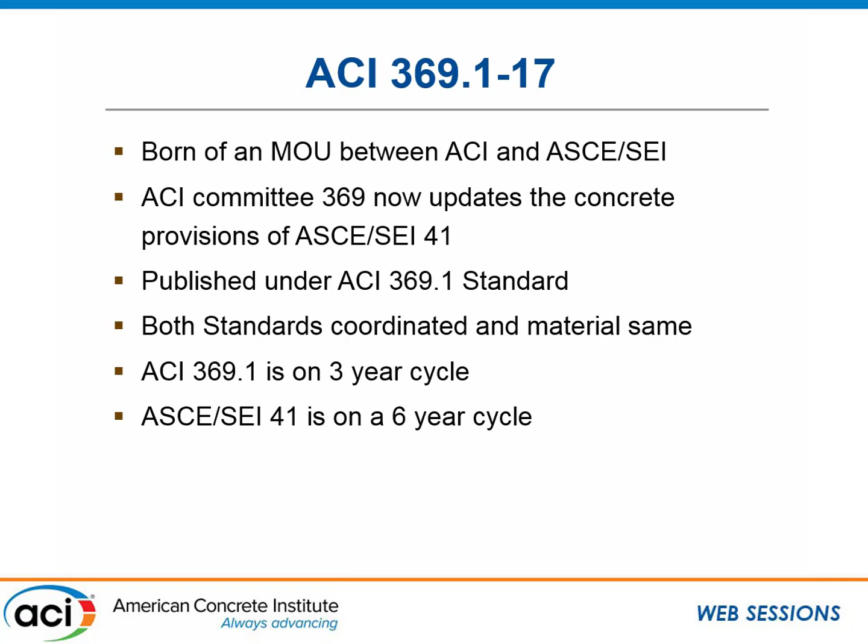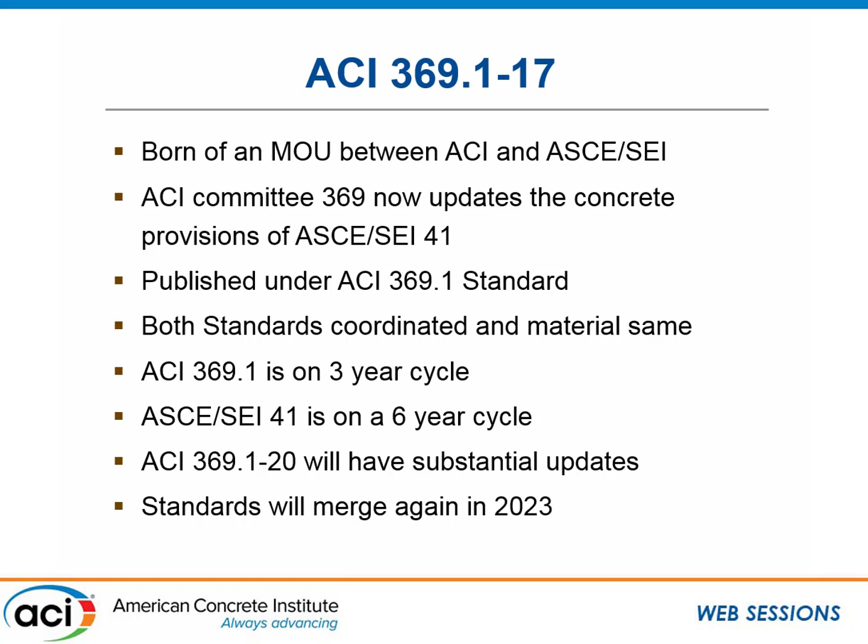And what we're going to talk to you about is what are the big changes you can expect for the 2020 code cycle. So what have we been up to and what we're doing there. Our standards will merge again in 2023. So in 2020, the ACI 369 standard will be substantially different from ASCE 41, and in 2023, all these changes and any additional changes we make will get into the 2023 version. And this is what our standard looks like, and there's also a metric version.

So the committee itself, we've expanded. We have the one main committee and 5 subcommittees. The main committee has 23 voting members and is balanced according to ACI rules, as well as consulting members and associate members. We have the general provisions subcommittee, the frames subcommittee, the walls subcommittee, diaphragms and foundations, and retrofit.

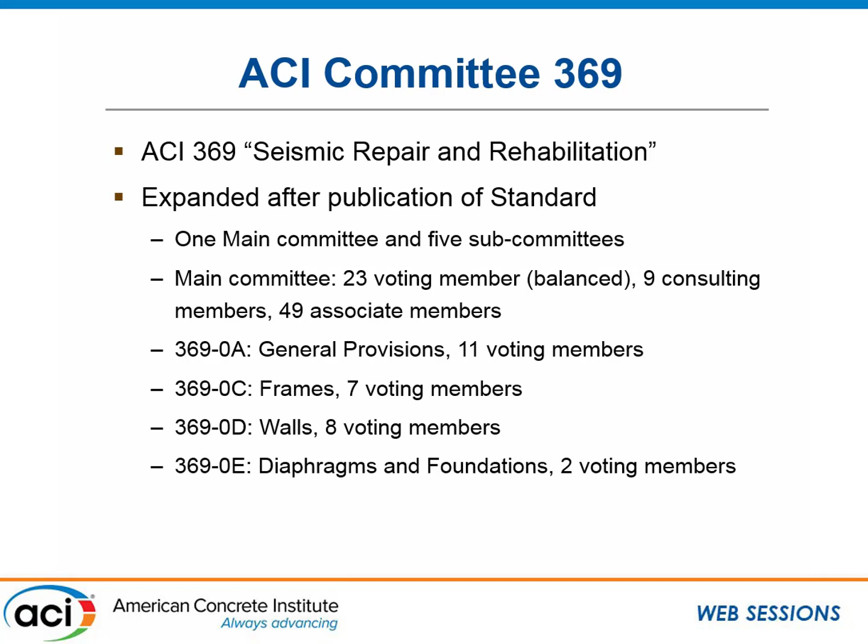I want to talk a little bit about a project that FEMA is supporting, through ATC. It's a very big project. FEMA is providing funding to make really big changes to 41 and 369. These are the things that committee members cannot do on their own; these are very big efforts. We met earlier this year, a steering committee, and we decided on the high priority topics that FEMA will be funding.

These are listed here: linear procedures, nonlinear procedures, Tier 1 and Tier 2 procedures. What matters to ACI 369 directly is the concrete structural wall provisions. There are also some URM masonry provisions being changed and foundation modeling provisions also. There are big changes coming this way. In the linear procedures, we are looking at them from the ground up, seeing how well they do and really updating them.

Nonlinear procedures, Adolfo set up this one really well with his presentation. There is serious talk about, for collapse prevention, removing all member level checks and going to more global level checks, trying to account for the fact that the failure of one member does not necessarily mean the failure of the building. And for that, there's also increasing member criticality in the deformation-controlled function. So there's a lot of things here, but we're going to focus on the concrete part of things.

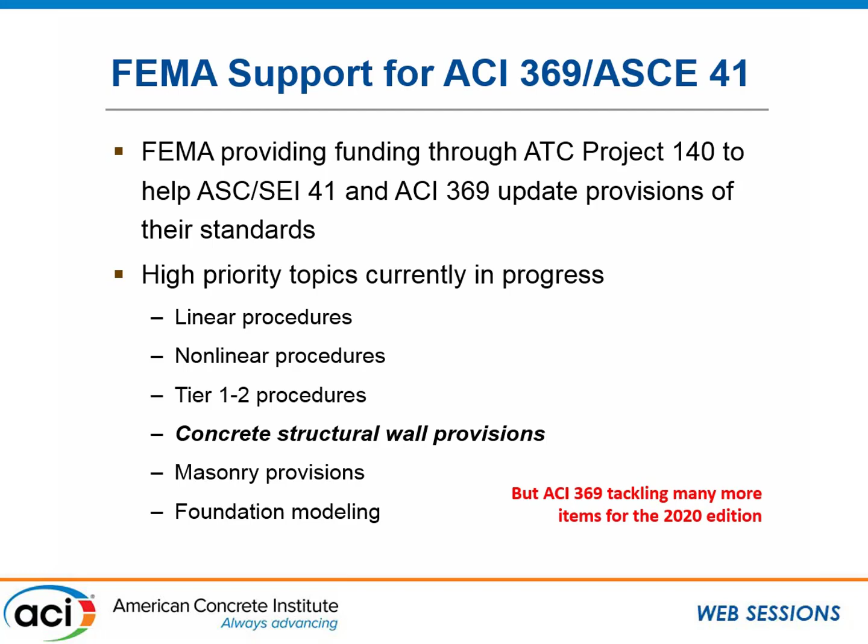And ACI 369, just to mention, so this is the project, the structural walls are being worked on within that project, but we're tackling a lot more things in 369, and that's what we're going to present today. With that, I'll open up to Insung Kim, who is the chair of the General Provisions Subcommittee.

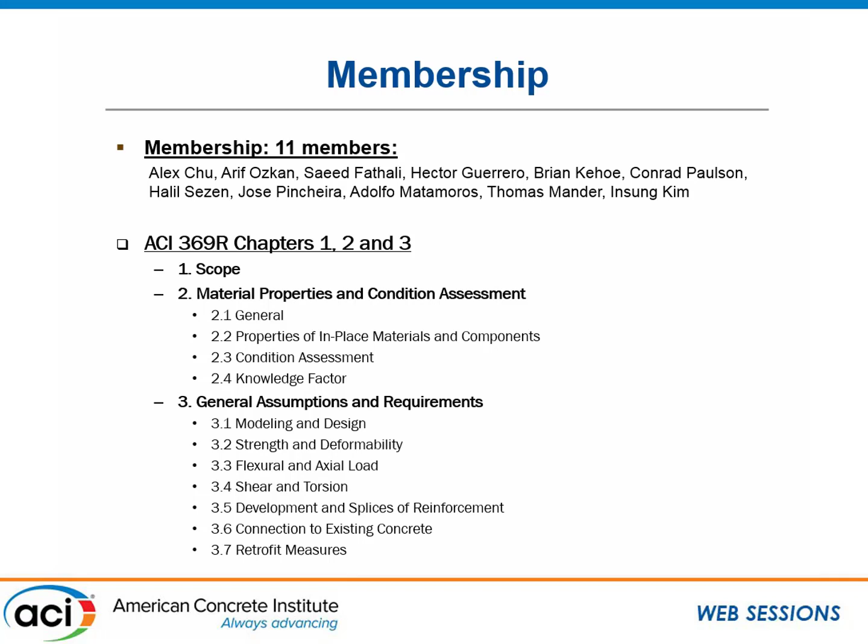Okay, so as Washim mentioned, we have 11 members. We mainly take care of the 3 chapters, chapter 1 to 3. Chapter 2 is about the material properties and condition assessment. And then chapter 3 is more like the general calculation or general estimation of strength and deformability and so on. So we are dealing with not member specific, but more like general ideas applied to all other chapters.

Currently, we have 5 or 6 main tasks. First one is anchor testing and strength provision. So basically, the idea is when we have existing anchors in the existing structure, when we evaluate this existing anchor capacity, how are we going to do it? How many samples we need to take, what kind of test method we need to use, and where we need to test. That kind of thing is being developed now. It is led by Brian Kehoe in our membership.

And the other thing is about material strength. When we do nonlinear analysis and even linear analysis, ASCE 41 has 2 actions. One is force-controlled action and the other is deformation-controlled action. For deformation-controlled action, we use expected strength, and in the ASCE 41 definition, that's the mean of the strength from the test. And then we have lower bound strength for force-controlled actions, which typically corresponds to nominal strength.

So Adolfo is leading this effort on how we're going to set up this lower bound and expected strength more adequately. I have another slide for that. And then also effective stiffness. When you do either linear or nonlinear analysis, you need effective stiffness of members, and ASCE 41 has a table, and our standard 369.1 has a table, Table 5, showing the reduced effective stiffness from the gross stiffness. We will try to update those values.

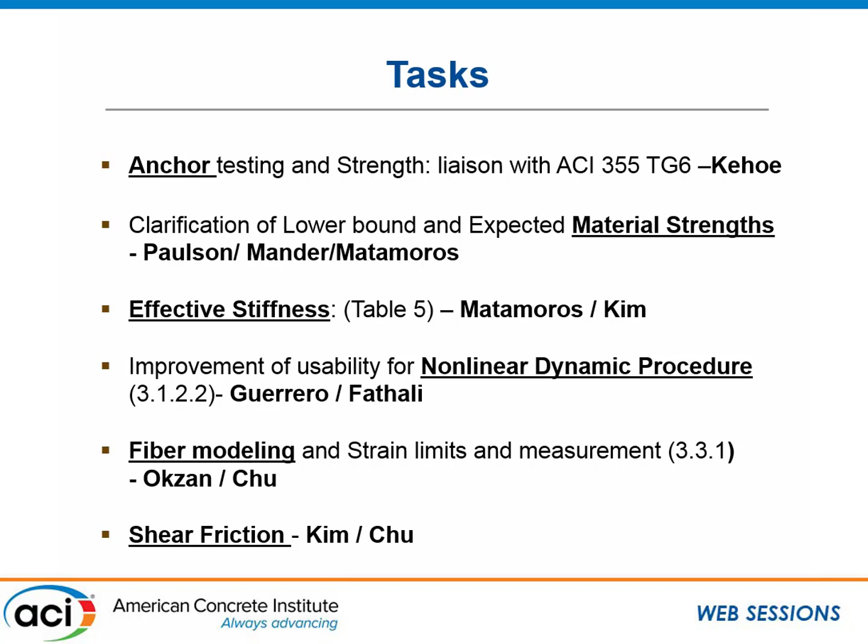So one of the things we are working on, which Adolfo is leading, is lower bound and expected strength. Right now, for example, for steel reinforcement, we have just one factor, 1.25, which converts nominal or lower bound strength to expected strength. And now we are thinking about what that number actually needs to be. That 1.25 includes the actual overstrength of yield when you test it, and also includes some of the strain hardening effect.

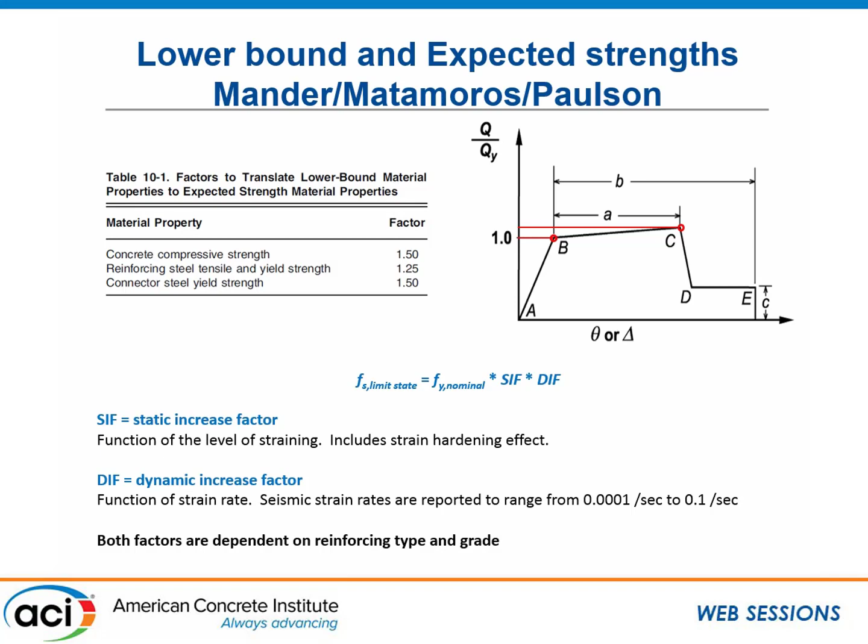And then we try to separate that and put it as two separate factors, one for the actual overstrength and the other for strain hardening. And we are also considering implementing a dynamic increase factor, which considers the strain rate effect. So that's a SIF for the overstrength of yield and strain hardening, and then DIF for the dynamic strain rate effect.

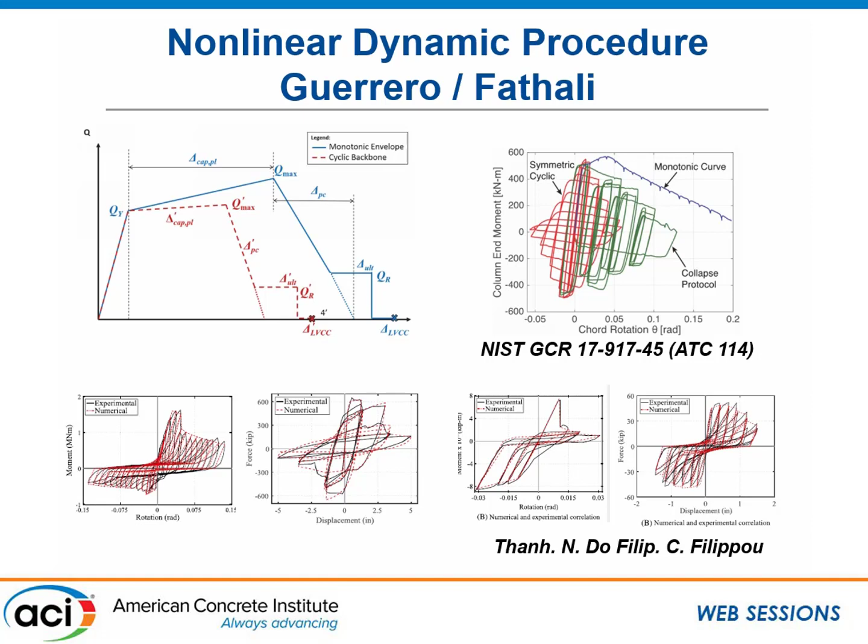And also we are trying to improve the nonlinear dynamic procedure using the recent studies from ATC 114 and other projects. So basically, we try to provide more guidelines on how, when people do nonlinear response history analysis, to model the hysteresis, based on our knowledge from the test data and these kinds of projects. So that's pretty much what I have.

Orders from the boss to do it quickly, so we'll go as fast as we can.

The purview of 369 Sub C is the chapter on moment resisting frames, so that would be section 4 in the document. And as I was mentioning, the concern is we've made a lot of changes to the column provisions. We want to update all the other elements to make sure that we're being consistent throughout. We understand the different levels of safety that should be had when we're judging acceptance criteria, but in the modeling we should try to be agnostic.

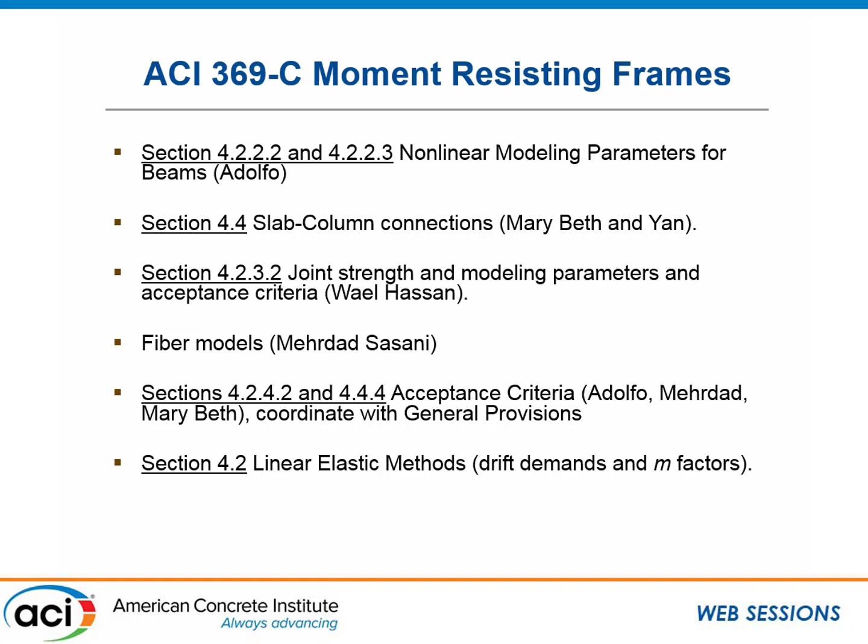We should try to represent each member in what it does. And so we're going to be working on beams, slab column connections, and joints. For example, for beams, we're looking at updating modeling parameters and eventually acceptance criteria. In the case of slab column connections, this is the work that is being done by Mary Beth Hueste from Texas A&M.

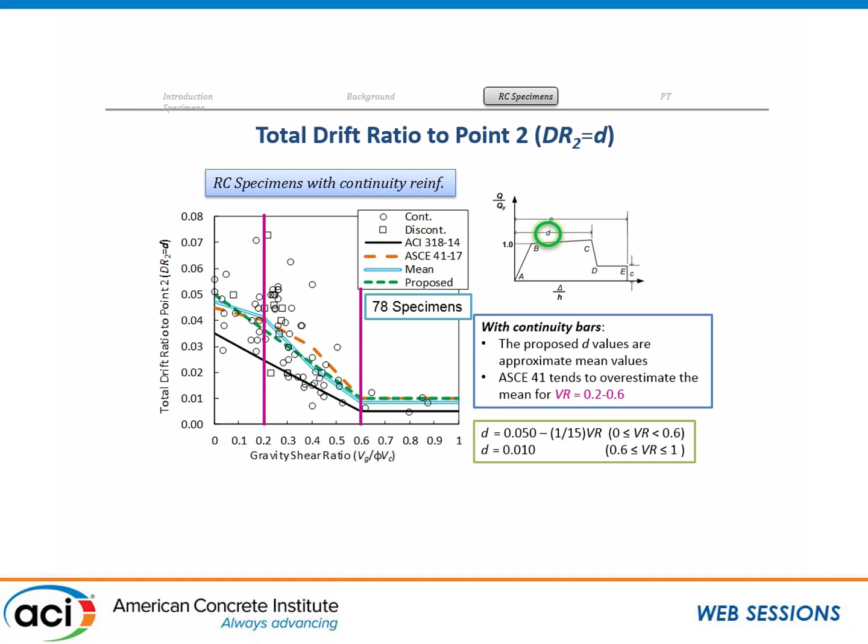You see here in her graph is total drift demand versus gravity shear ratio. This is very typical in the simulation and evaluation of these types of members. And what she's done is she's collected a database and is trying to provide, for example, the green line is what she's doing, the black line is what 318 does today. 318 for new design adopts a very conservative approach. For the purpose of modeling, we're looking more for a mean approach so that there's no bias between beams and columns.

In regards to joints, we're trying to take a close look at joint capacity equations. We think that those need some revamping. We're going to look at modeling parameters and acceptance criteria. And I think in Laura's presentation, there was a small thing that is extremely important, I think we need to provide better recommendation about what to do. There's that simple model that is in ASCE 41 now. The way that it is written in the provisions is only applicable to linear analysis. And so we think the code is silent on what to do with the joints in nonlinear analysis.

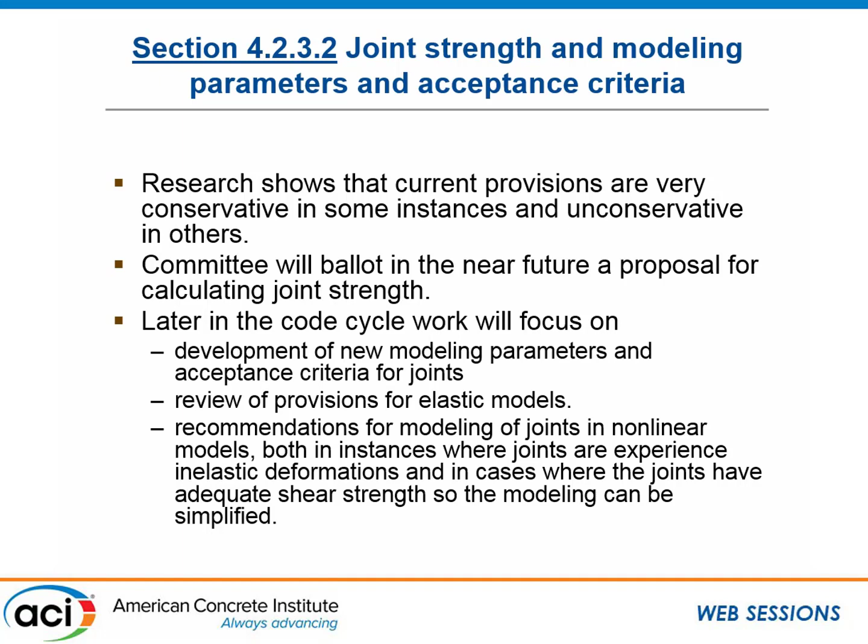And we're trying to listen to designers in the sense that in many instances the joints are not going to be the critical factor. So if we can look for simplified ways to model the joint when the joint nonlinearity is not critical in a nonlinear analysis, that makes the nonlinear analysis less painful. So we were trying to develop recommendations for that. And that's it for me.

I'll speak on behalf of Garrett Hagen. He was not able to come here. He's traveling overseas. He's the chair of the Wall Subcommittee. So we're going to give you a little bit of overview of what we're doing. A lot of this effort is handled by the ATC 140 project, but there's a lot of cross membership between the project team and the subcommittee. So we're going hand in hand in this project.

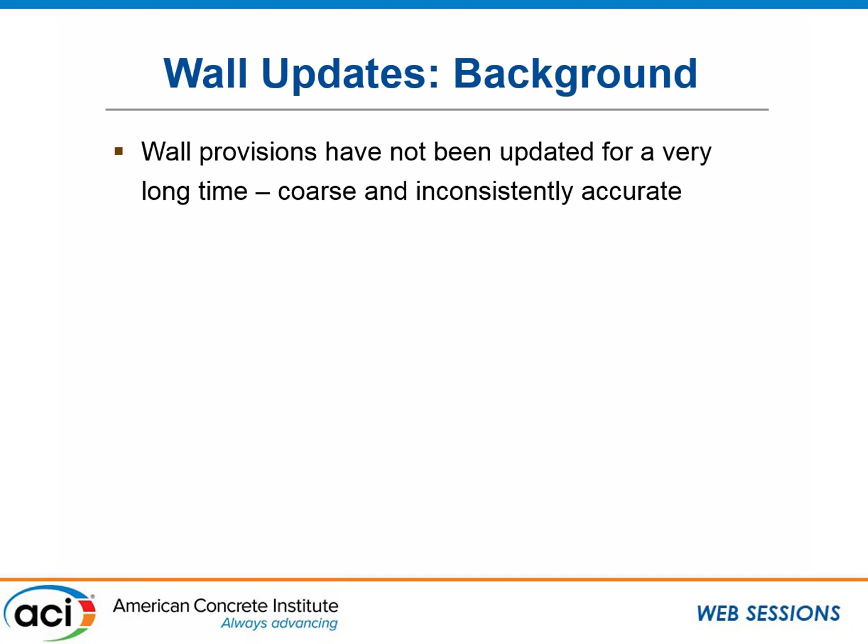So the working group is looking at really wholesale updating the wall modeling parameters and acceptance criteria, so big changes to be expected for the 2020 version. The wall provisions, we haven't updated them in a long time, specifically the flexural ones. We generally consider that they're quite conservative and they're inconsistent in conservatism and accuracy. These are his slides, I'm trying to do them justice.

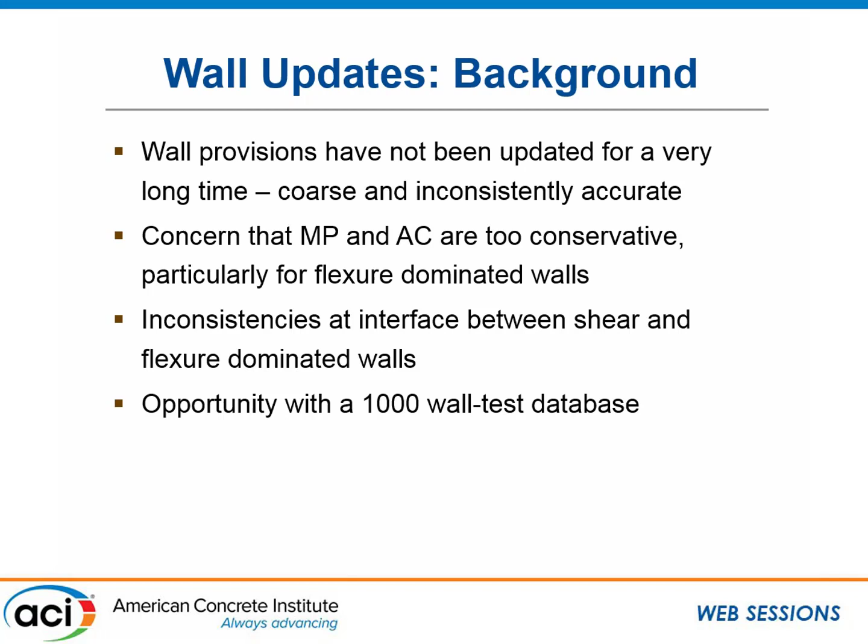So currently what we have is an opportunity. Professor John Wallace, who's also a member of the committee and of the task group, has populated a 1,000 or so wall test database with Saman, who's sitting here. He did all the hard work. And so we have an opportunity now to come in and really change the wall provisions. Also, things we're trying to address is limited modeling guidance. Most of the engineers use fiber sections for walls, whereas ASCE 41 or ACI 369 are written with only lumped plasticity. So how do you go from one to the other? How do you get to the right acceptance criteria with a fiber section model when it's given to you as a lumped plasticity thing?

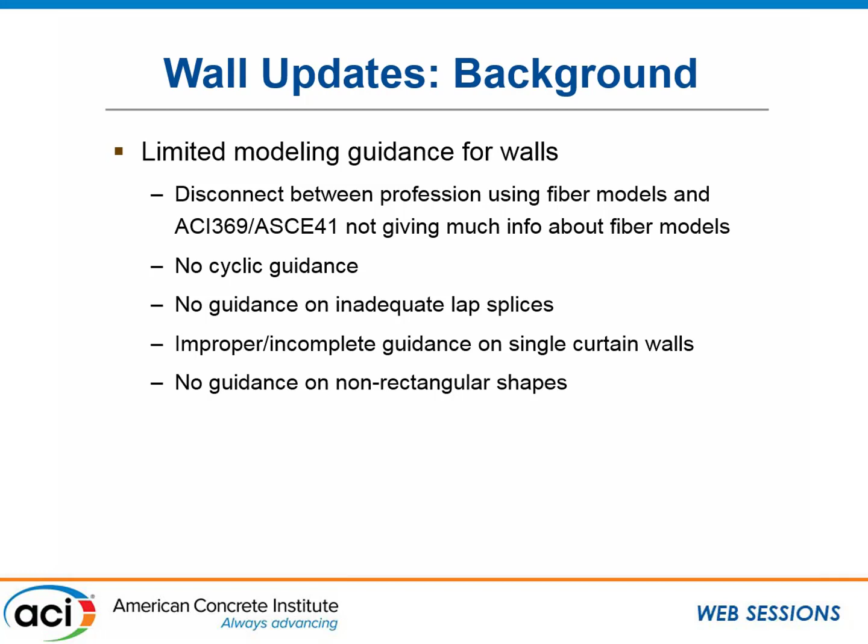There's also things that are missing. There's no cyclic guidance, which we will be tackling. There's inadequate lap splices. We only have the column provisions. We're trying to translate them to the wall provisions. There's also no real guidance for what do you do with a single curtain wall as opposed to a double curtain wall. Also, non-rectangular shapes are not really treated. In addition, looking at coupling beam issues, similarly, they have not been updated for a long time. There are some very conservative parameters in there. So also things like what is collapse for a coupling beam? Do we really need to worry about the coupling beam collapsing? Or is it just treated as a loss of lateral strength for the building? And also nothing much about diagonally reinforced coupling beams.

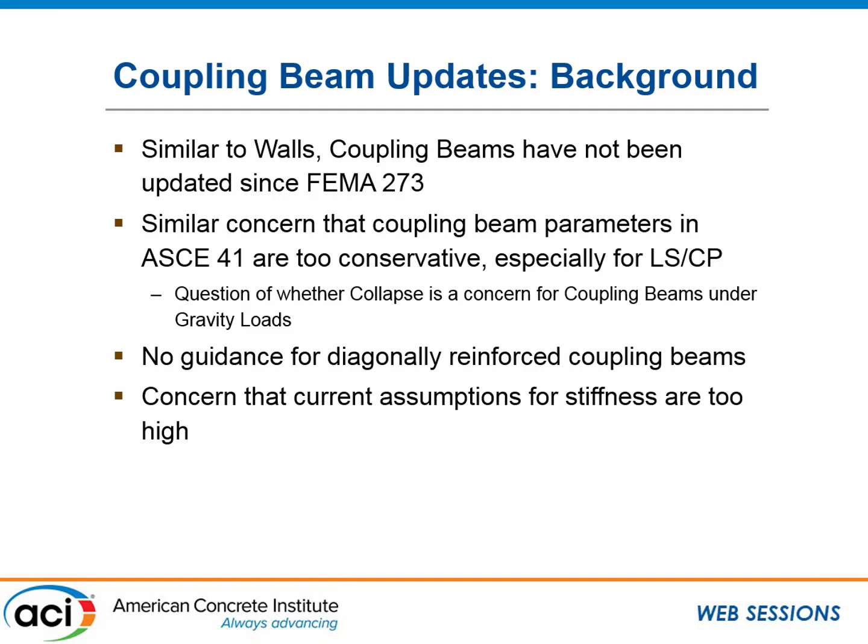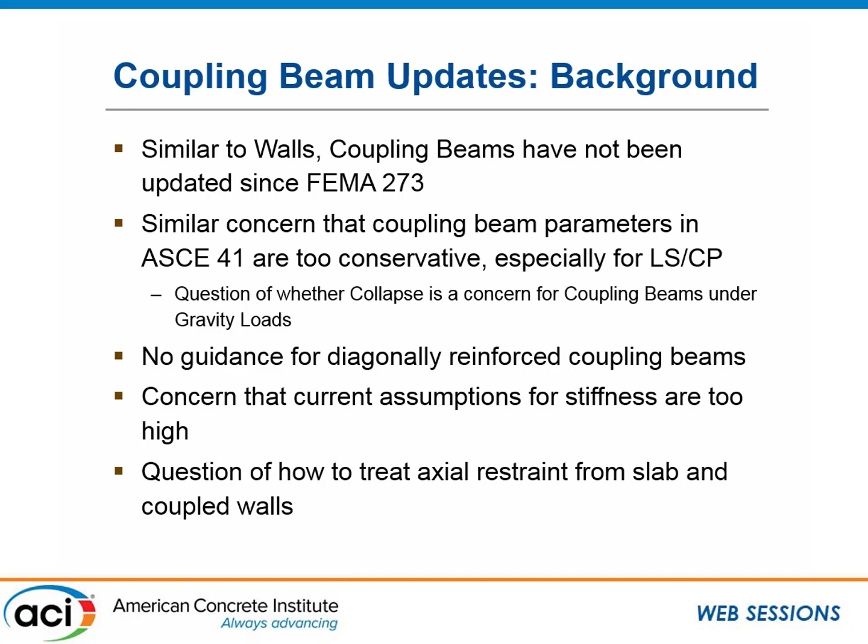We also have the stiffnesses being a little bit too high for our taste. Okay, one last thing. What to do with a slab? There's nothing about what is the performance of a coupling beam that is framing into a slab section. So the objectives, I kind of mentioned them as I was going through. We're going to revise the modeling parameters and acceptance criteria for the walls. We are going to give full modeling response guidance, including cyclic behavior. So this is going to be new in ASCE 41, ACI 369. This is the first member where we're going to put cyclic guidance in there.

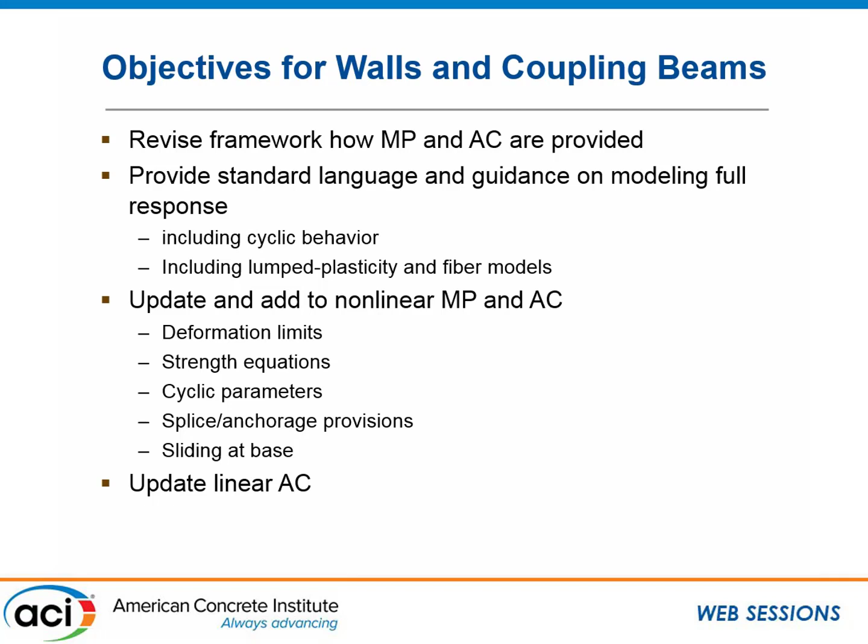And we're going to look at everything from deformation capabilities, strength equations, splice and anchorage, even sliding at the base of the wall. And finally, we will update the linear acceptance criteria. So a lot of changes. If you're not happy with the wall provisions, wait 2 years. In 2020, there is going to be a lot of changes there, including cyclic behavior.

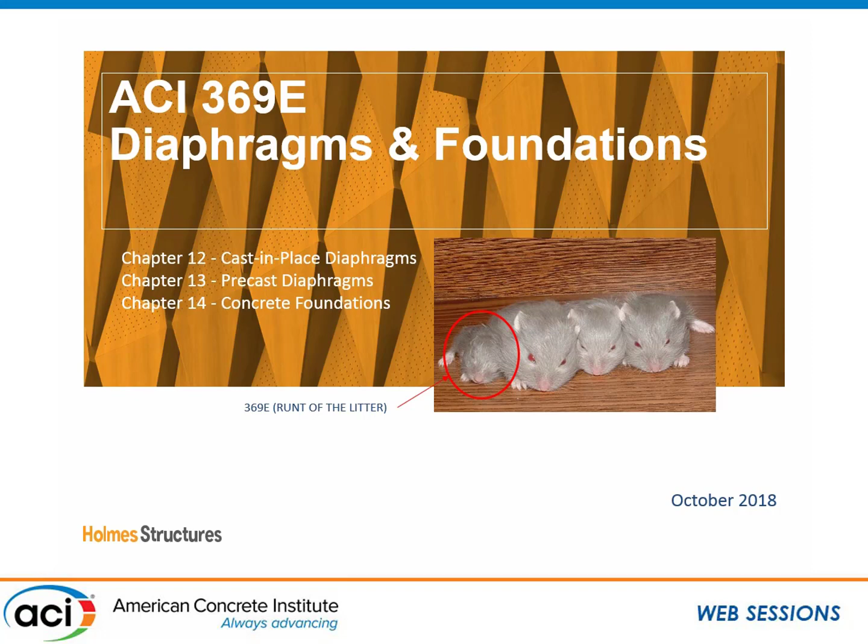So this is what we are calling the diaphragm and foundation committee. You might see that this committee has only 2 members, so we are still looking for people to join this committee. The problem is, I think there are not many people actually interested in this committee because we don't really know much about diaphragms and foundations. So currently,

ACI 369 and ASCE 41 have very conservative provisions for diaphragms and foundations, because we don't really know much about them. And sometimes we ignore them in our design, but they are very important load path components when we're dealing with lateral load. So basically, Arne is

working on identifying typical problems in diaphragms, such as the slab to wall interface, which is related to the 369A general committee shear friction issue, and then the precast concrete diaphragm problem with frame elongation. You might have seen Ken Elwood's presentation about the Statistics House building in New Zealand. When the earthquake happened, the beam elongated, and the hollow core panels became unseated and then collapsed. And then also ramps and stairs. He is tackling how to deal with ramps and stairs in the lateral system.

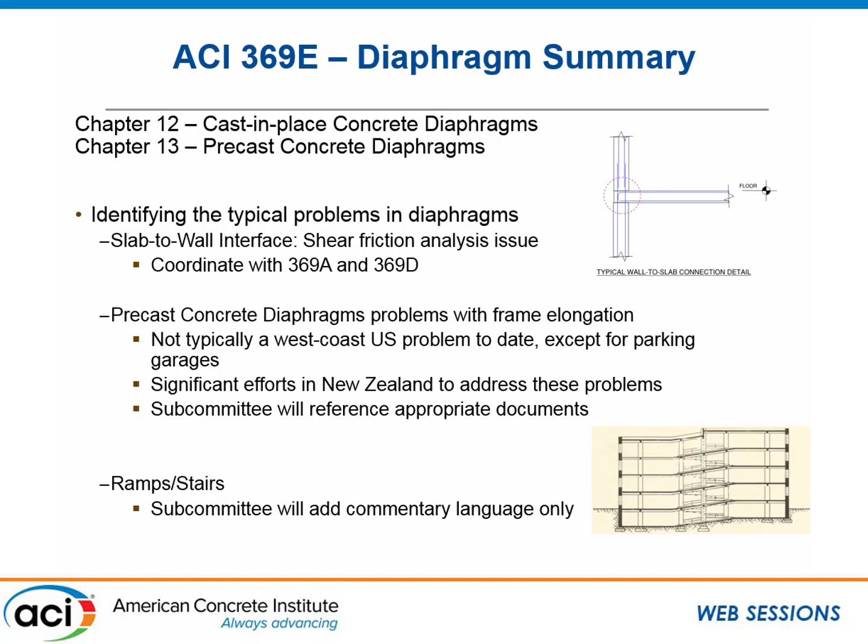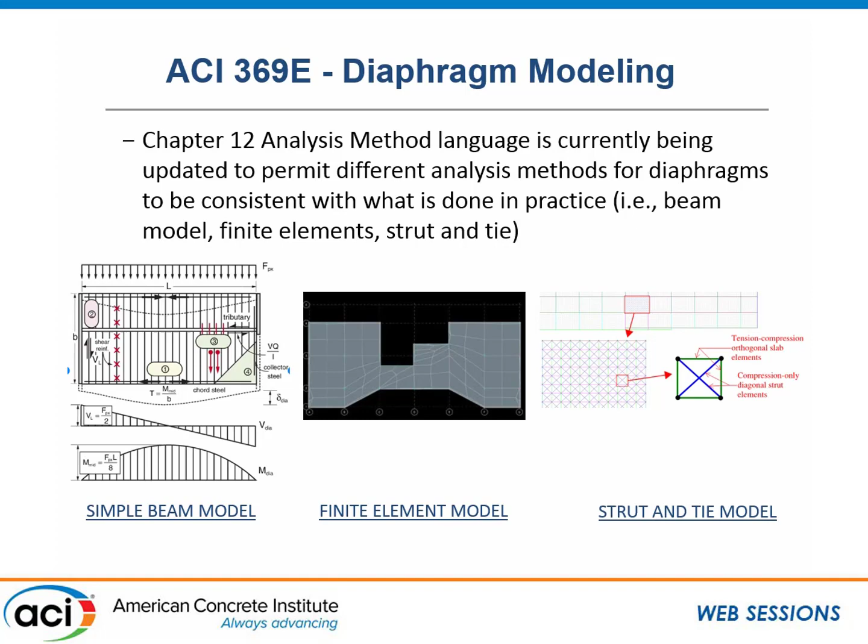And also some modeling of the diaphragm, either a simple beam model, a membrane model, a finite element model, or a strut and tie model, and how we can model diaphragm behavior more reasonably. And he is also working on foundations, here specifically footings, concrete foundations. All components of existing foundations shall be considered as force-controlled actions.

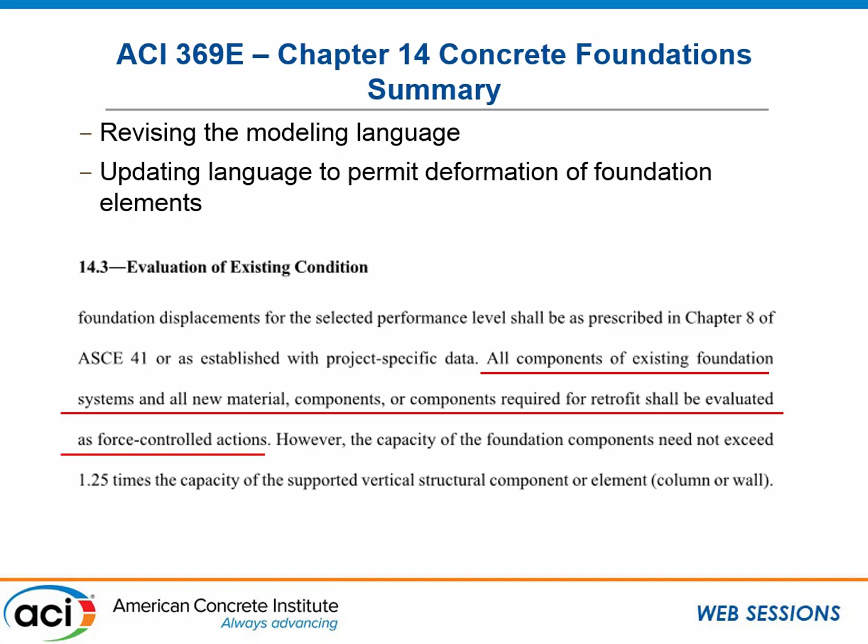That's an issue. Basically, because we don't really know much about concrete footing or foundation behavior, these actions are considered force-controlled. So practitioners have some difficulties, which end up with unnecessary retrofit of foundations. Yeah. So that's pretty much it.

And you start with me, you end with me.

I'm the chair of Subcommittee F, the Retrofit Subcommittee, and we're in charge of providing information on retrofitted components, how to model them and treat them. Currently, the ACI 369 standard does not contain any information on retrofitted components. So we need to add information on all of these items that pertain to components that have been retrofitted in an existing building that requires retrofitting. So we need to add material properties.

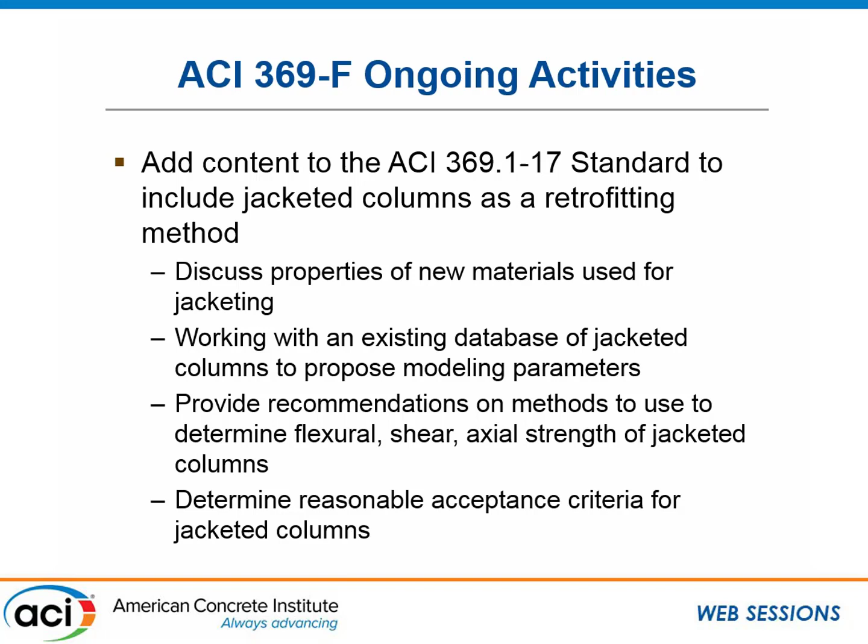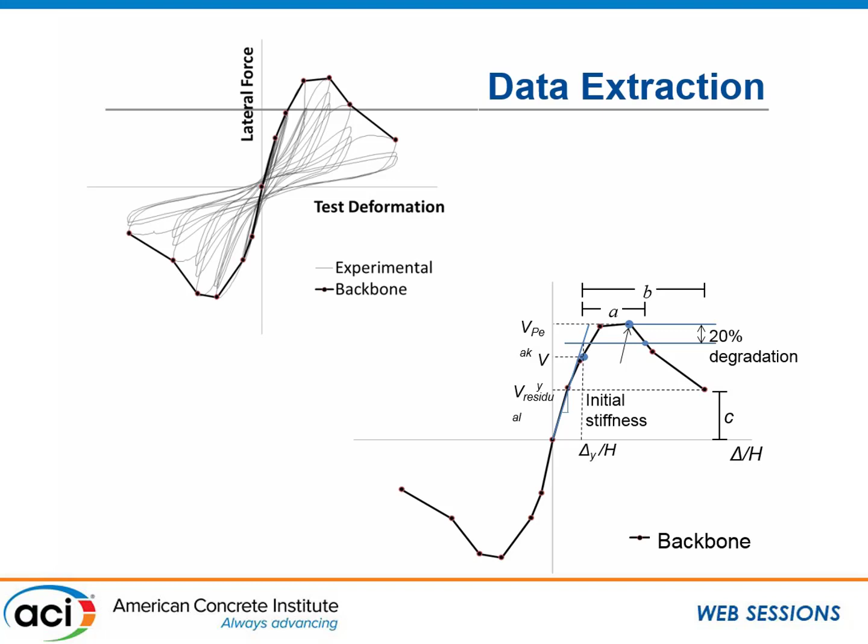This is the shape of the backbone curve that we're proposing. You've seen this before, I won't dwell too much on this slide. And these are some of the items. This is an example hysteresis curve obtained from the database and how we have extracted some of those modeling parameters. With those, we have created a probability or fragility curve for one of those parameters. This is just for a sample of FRP jacketed rectangular columns.